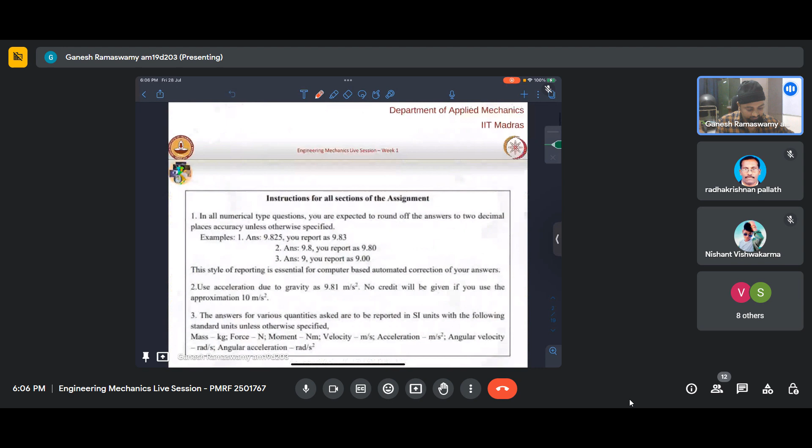Okay, then let us get started. Let us look at the first question. But before that, it is important to note that each and every week you will find the instructions to all the assignments, which are more or less common for every week. We need to keep this in mind, because given the sheer volume of courses being run on the SWAYAM portal, it is not possible for each and every course to be graded manually.

Hence, we go for computerized grading, which has its merits, but there are some limitations we need to respect, some constraints, in the sense that if your numerical answers are beyond that range, it might be graded as incorrect, even though you might have understood the concept clearly. So it is very essential that while doing the calculations, you please abide by the instructions given on top of each and every assignment sheet.

And mostly the G value we'll take to be 9.81 instead of 10. And mostly all the questions will have its units mentioned there, so please make sure that you answer the questions in the units that have been asked in the question. Other than that, the things are pretty straightforward, so we'll take the questions as we go along solving the problems.

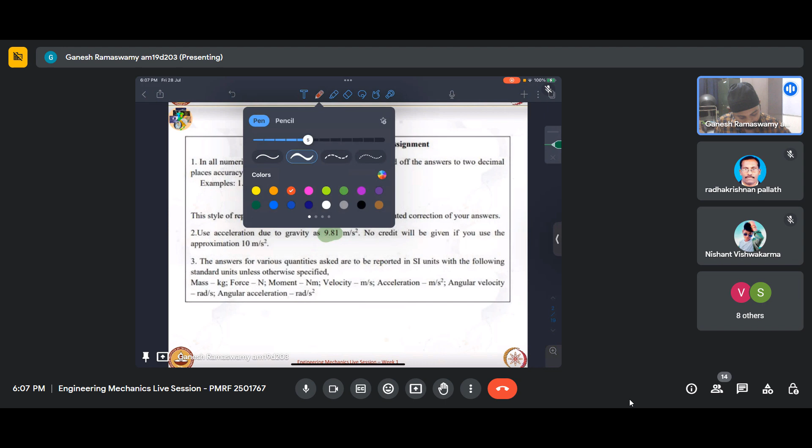Okay, so let us look at the first problem. Which of the following representations, one or more, follow the laws of vector addition to give A plus B equaling R? So we have four options here.

If we take case number one, I have a vector like that, which is A, and I have a vector like that, which is B. Now we know that when there are two vectors to be added, essentially what we do is we place the tail of one to the tip of the other, and then connect the rest to get the resultant. If this is A and this is B, this gives C such that C is the vector sum of A and B. This is pretty straightforward; I suppose almost all of you are familiar with this, but it's good to start with fundamentals and then build upon them so we don't get stuck midway.

So with this background of understanding, let's look at the options. I'll remove this option here. We have A like that, and then B takes it down, and then we connect the tail to the tip of the vector, and we get the resultant. So this surely follows the law of vector addition.

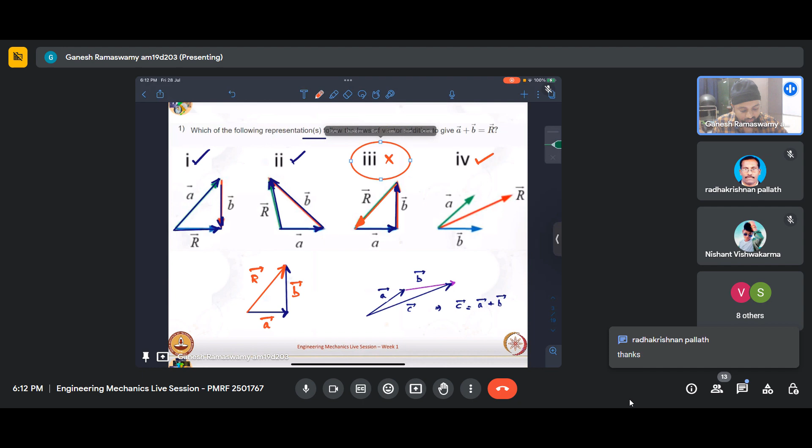So we can see that option D definitely follows. So the answer to this is 1, 2, and 4. Option 3 does not follow the law of vector addition. I hope this is clear. If there are any questions, please feel free to ask anytime.

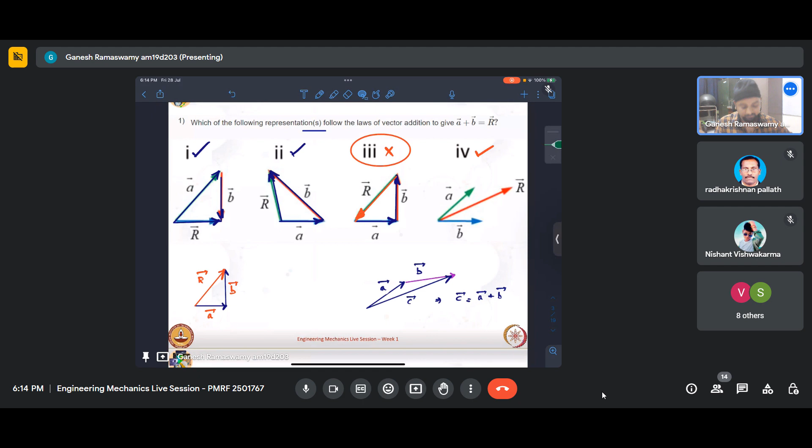So let me move on to the next question.

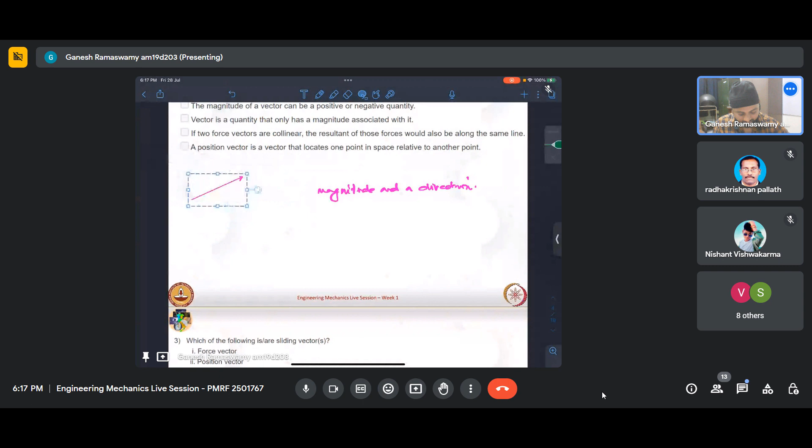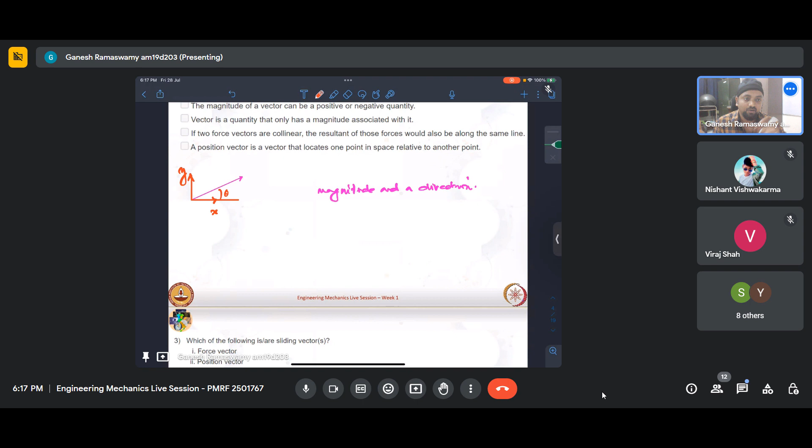So I would rather draw this again. Let me explain it first: we have a vector like this, with a magnitude and a direction associated with it. If we place it in space, let's say this is the x direction and this is the y direction, and I have this pink colored vector making some angle with the x-axis. The moment we have an angle, we have the direction associated with that vector. What else is needed to characterize this vector? Its length - once we know the length and direction, we know everything about that vector. So the length is characterized by its magnitude, and the direction is defined by theta.

So if we consider the same example but with a negative force, essentially what happens is that theta has changed, but the magnitude still remains the same. So the magnitude of any vector, which characterizes its length, is invariably a non-negative quantity. So this statement is not correct.

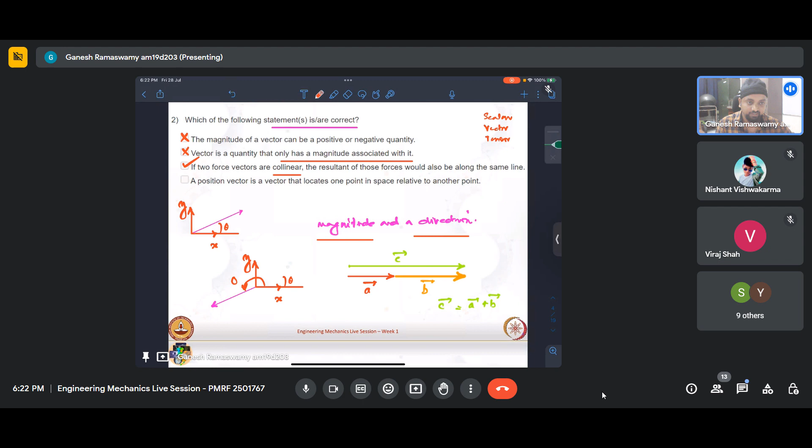Yes. So essentially what we do while discussing, I'll just add one page here. Position vector is essentially useful in dynamics because even in statics, for calculating moment, if we have a body and we apply a force on the body and we are trying to calculate its moment about some point O, this is where the force is applied. So essentially I have to find out this vector. If I call this point A, then this vector is R A with respect to O.

Now R A with respect to O, this A is where force is applied. O is a point with respect to which moment is calculated. Now I'm just trying to explain this with an example of a force and a moment. So it will apply the same to other vectors like displacement, acceleration, and so on. I hope that is clear.

So what we essentially do is when we say we are to calculate R A with respect to O, the first step we do is we imagine, in the Cartesian coordinate system, we imagine the XY axis. We are talking about planar conditions right now, the XY plane. When we go to 3D kinematics, we will explore the third dimension also. But essentially, the principle still remains the same.

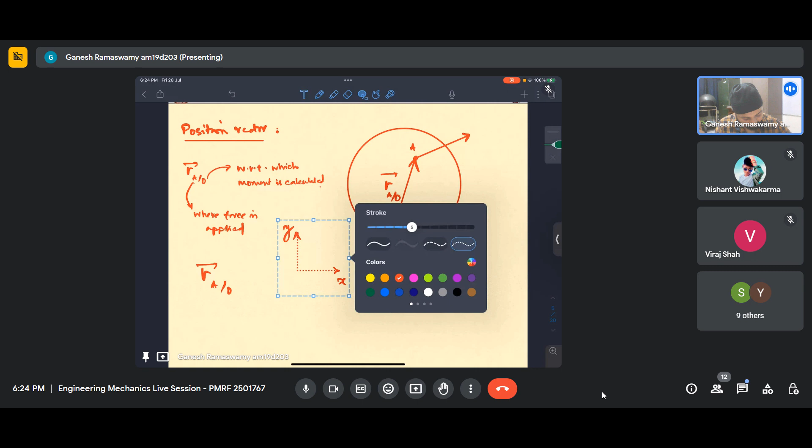So the first thing we do when we have to calculate RA with respect to O is take a coordinate system. We know we have to calculate RA with respect to O, so we fix that coordinate system at O, the origin at O. We shift the origin of this coordinate system to O, as you can clearly see.

Now the position of A with respect to O, with O as the origin, we can easily calculate once we know this distance. Let us say its length, by some geometric condition we know its length, whatever that is. Let me draw it here.

Let us say this is some M, and it makes an angle theta. So my RA with respect to O would be M cos theta i cap plus M sin theta j cap. This is how we write the position of A with respect to O.

Now if we were to do the same thing for R of O with respect to A, this is nothing but the negative of RA with respect to O.

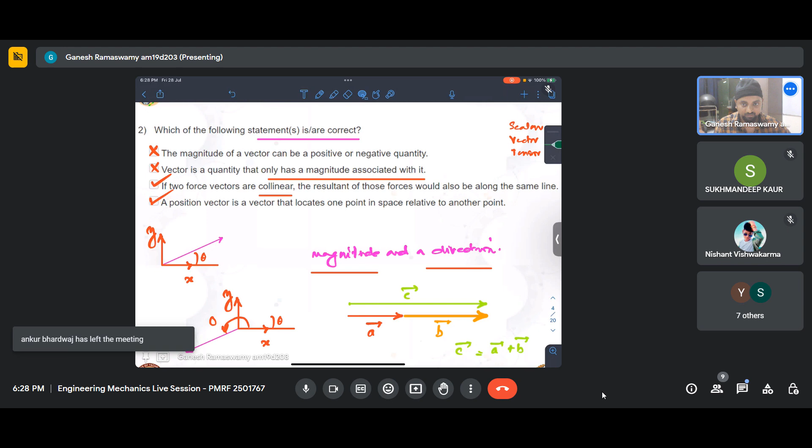Okay, so let us move on to the next question. Which of the following are sliding vectors? Force vector, position vector, and moment vector. So essentially we need to understand about vectors.

So we will have free vectors, we will have fixed vectors, and we will have sliding vectors.

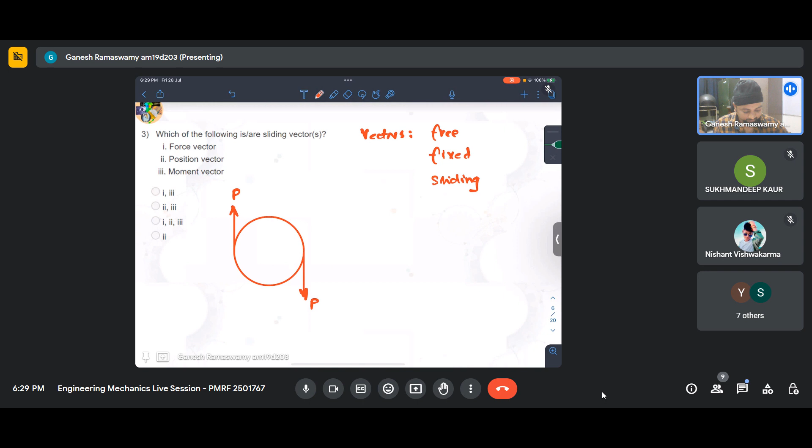Now let us say I have a system, and I apply two forces on it. Let this be force P, and let this also be force P, and let us say that this distance is D. This mushroom colored body is where I'm trying to apply this force. So what will be the net effect of this force?

Let us say that I calculate the moment about this point. Let me call this O, and let me set up a coordinate system like that, X, Y, in green and small. So now I have fixed an xy coordinate system to that point properly.

Now I'll calculate the moment about O. Moment is given by R cross F, it's a cross product. So what is R? Let me call this point some A. So moment at O is RA with respect to O, crossed with force, and force is P vector. Force and moment vector are sliding vectors, so the correct answer is option A. One person has already given the correct answer, so we'll discuss why that is anyway.

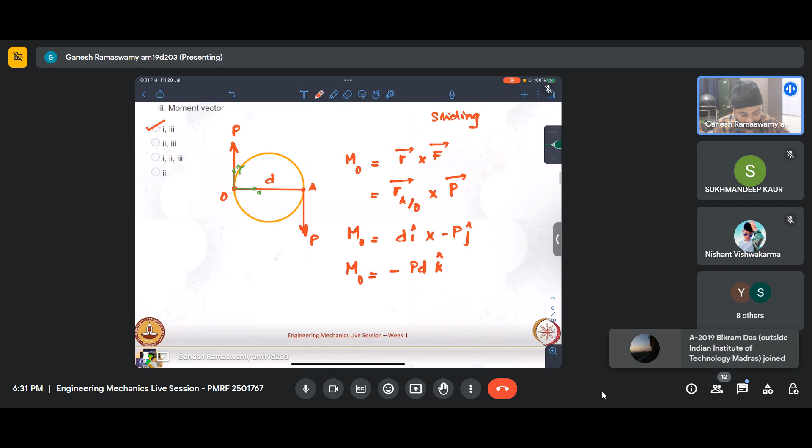Now this moment is a couple that is getting formed, and if I put that couple, let me represent the same system again. One minute, let me make this again. Now what I'll do is I'll replace this with that coupled system.

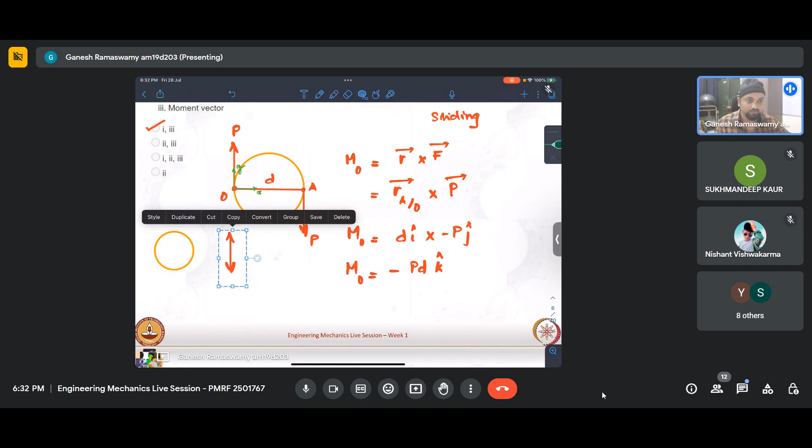So what is the total force? Total force acting is 0, because I have one P acting like that and the other P acting like that. So how will I add them as vectors? I will put the tip of one onto the tail of the other, and I essentially come back to the same point. What does that mean? That the net force is 0 — there is no net force acting on the system. I hope that is clear.

Net force equal to 0. Net moment is PD about this point — there is a couple like this. It so happens that when there are two equal and opposite forces placed a distance d apart — needn't be d, call it any variable apart — it will create a couple, and that couple is a free vector. Meaning I can move this around to any point in this body and it will give me the same external effect; it will still rotate and give the same external effects. This is what is meant by a free vector.

Okay, next, if we look at a fixed vector, essentially the position vector is a fixed vector in space.

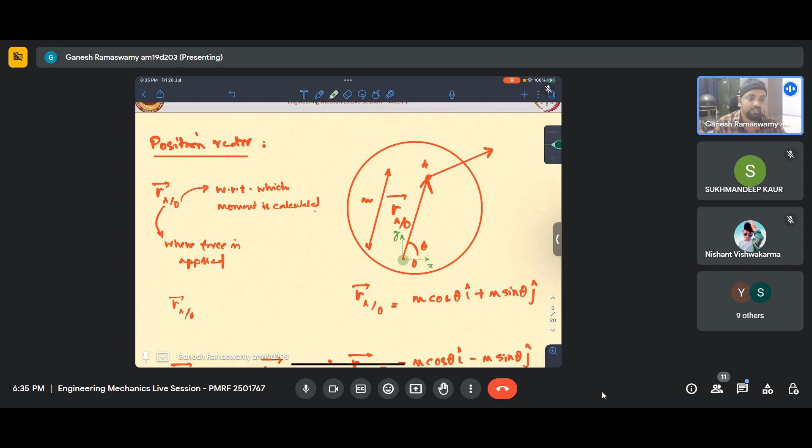Okay, so we were discussing fixed vectors. Right now we are dealing with a course that idealizes bodies as rigid; we have not gone to idealizing them as deformable. So what does rigid mean? That under the action of loads, the distance between any two points on an object doesn't change — that is the definition of a rigid body. So when I say R of A with respect to O, point O is fixed and point A is fixed. I needn't say this is specifically point O — I could take any point and label it as O — but once labeled, and A labeled with respect to it, nothing else changes; I have to be consistent with that. In such a case, the position vector becomes a fixed vector. So that is what a fixed vector is.

Now coming to a sliding vector — to understand a sliding vector, we must understand the principle of transmissibility of a force. What this says: let us say I have an object like that.

I'll repeat this in Hindi, but first let me cover it in English. Let us say I have an object like that and I apply a force here. What do we anticipate — this will have a translation and a rotation. Call its CG here — it will translate as well as rotate.

Now the principle of transmissibility states that if I have a line along — if I have a line like that, let me make this line dotted, let me color it something else — the blue dotted line is the line of action of that force. Let me move it a little bit and get a copy of this.

I'll keep that force for now. This is the line of action of that force. I hope this is clear.

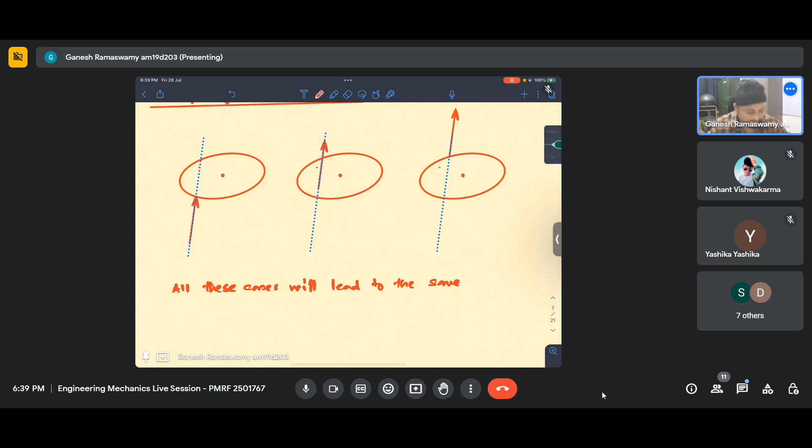This is what principle of transmissibility states. If there is a force applied to a rigid body, and if you move that force along its line of action, the external effect on that body remains the same.

What is the external effect in this case? It will translate and rotate. If you apply that force, what will happen? It will go like this and rotate like this. So that is the external effect. This is what principle of transmissibility states.

Now this can beg a question. Moments will be different? Moments will not be different. That is the entire thing.

Let us say this is the CG of that body, okay. It's a good question you have brought up. Let me try to answer it convincingly.

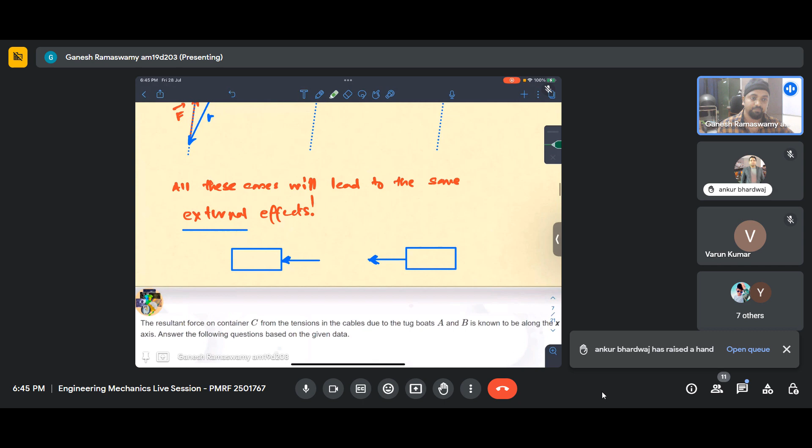That is why principle of transmissibility only applies to rigid bodies. Exactly. But they are rigid bodies, so it doesn't matter. Exactly. So that point, I suppose it has been conveyed successfully, or you would have perhaps gauged it on your own.

So this is what a sliding vector is. Force essentially is not changing its... Yeah Ankur, Mr. Ankur Bhardwaj, I will answer your question, so you can unraise your hand. Okay, so force essentially is a sliding vector because when we slide the force along its line of action, it does not cause any external effect change. That is what a sliding vector is.

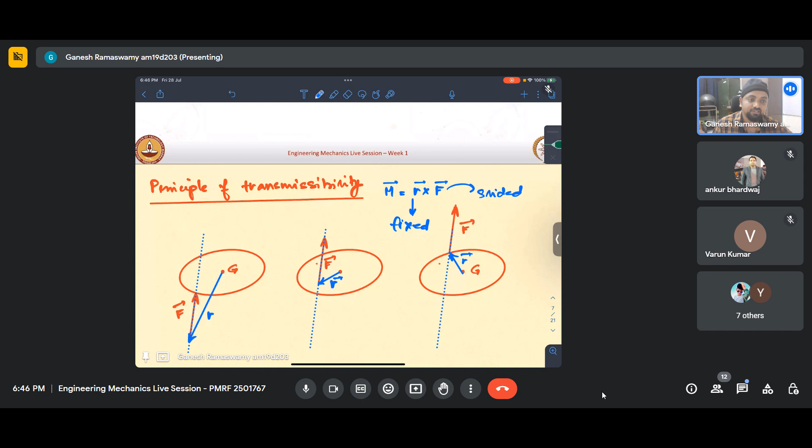Now we know that moment is r cross f. This is a fixed vector, and we have force as a sliding vector. So what should moment be? R is fixed, and force F is sliding. So essentially moment also becomes a sliding vector. So I hope that is clear.

Sliding vector. Yeah, I saw some gate exam question, I'll come to that in a minute. So force is a sliding vector, position vector is a fixed vector, moment is a sliding vector. So 1 and 3 - whosoever had answered 1 and 3, it is correct. So I hope I explained it clearly.

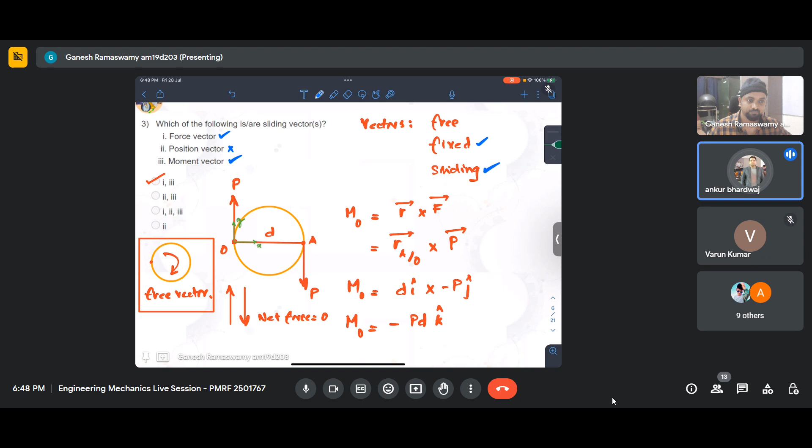Yes please, somebody had raised their hand. Please go ahead and ask. Okay. Okay. Okay, I'll try to explain here.

You can refer the lecture. It is said in the lecture. You watch lecture number 2 or 3. It will be discussed there. Professor will be discussing it there.

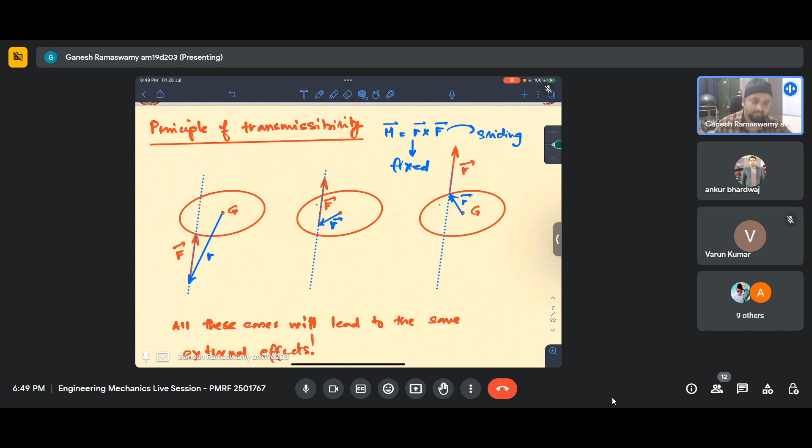Okay. Main lecture notes transcripts would be available on the Swayam portal on the left bottom - text transcripts, it will say. No, that we don't have access to. That only professor has access to. Okay, but those slide screenshots along with the text explanation is what is provided in the transcript. So the transcript should serve your purpose well. There is absolutely no problem about it.

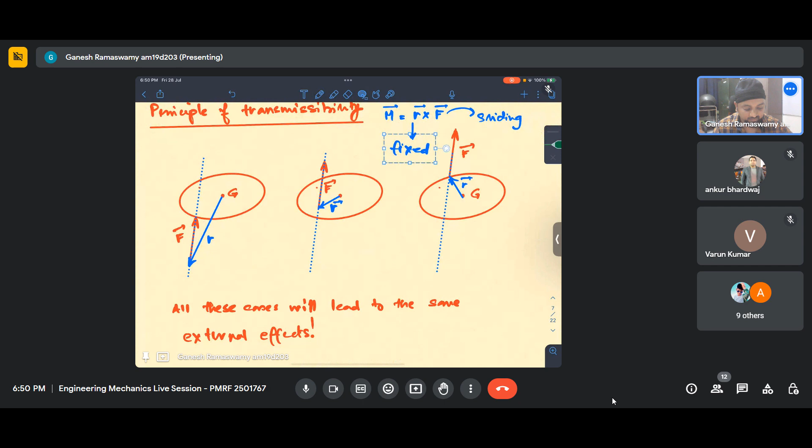So what I was saying is if a body has a force applied as a sliding vector, why does sliding it essentially carry over its dependence to the moment vector? Simply speaking, if one variable is fixed and the other has a variation, what will you call M to be having? Will it have variation or not? That is all the principle is.

M won't vary. Why M won't vary is because of this distance. What is M? M is essentially a cross product, so the cross product between these two will essentially involve this perpendicular distance only, and that perpendicular distance always remains the same. This is why the moment will come out to be the same. You can calculate it and see for two, three cases.

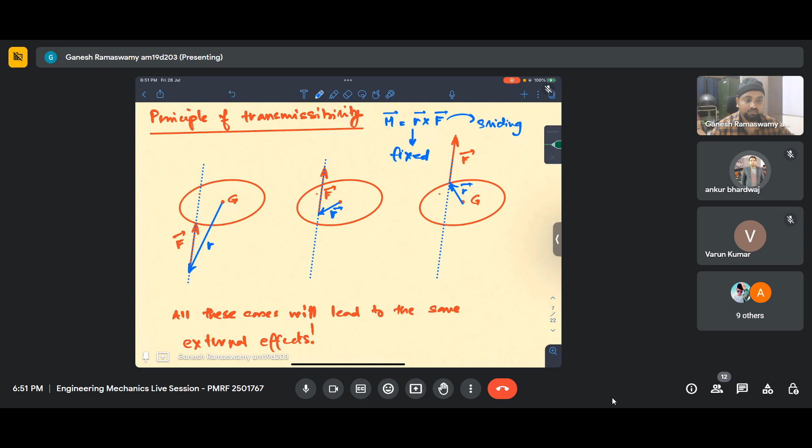Okay, so I take it that this is clear. I'll just remove this. Let us move to this question.

The resultant force on container C, from the tensions in the cables due to the tugboats - these are tugboats essentially trying to pull it or something - A and B is known to be along the x-axis. So they have given x-axis like that, y-axis like that.

One thing we need to keep in mind throughout this course and throughout mechanics study is that we follow the right-handed coordinate system. What that means is if we have x like that and y like that, z will invariably be pointing out of the plane of the paper or the screen as we see it. So z would be like that because of the right hand rule. This is how we have to follow cross products also. Please don't forget this.

I'll just keep it here. Okay, so here x is to the right, y is pointing upwards. Can anyone tell me where positive z will be? Will it be out of the plane of the paper or into the plane of the paper? Yeah, essentially it will be out, because if we see the cross product, x cross y comes out of the plane of the paper.

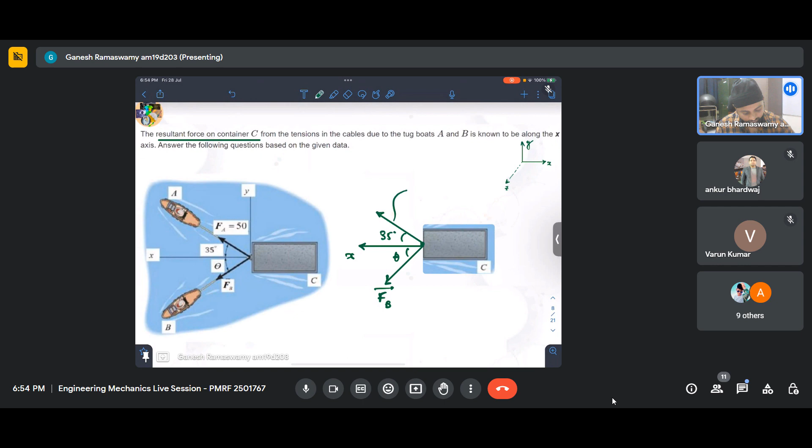So they have said the resultant force on container C - let me take container C and put it here. At this point I have two forces being applied. One is like that, and another force is applied like that. This is FB, an unknown force. This is the X direction, and this is given to be some theta, 35 degrees. And this force is given to be 50 newtons. I suppose it is in Newton - yes, it is in Newton. So this is 50 Newton, which is FA.

Let me color this in something else. Okay, the axis is colored in pink, and I have Y like that. So this is essentially the free body diagram of that container C. Now there are certain constraints given, let us look at them. Let me draw the arrowhead correctly once. So I hope that this is clear.

Now what they are asking is what should be the value of theta for force FB to be minimum and the resultant to be along the x-axis. So this is a rigid body, so we are only concerned about the force, not the internal effects that are happening.

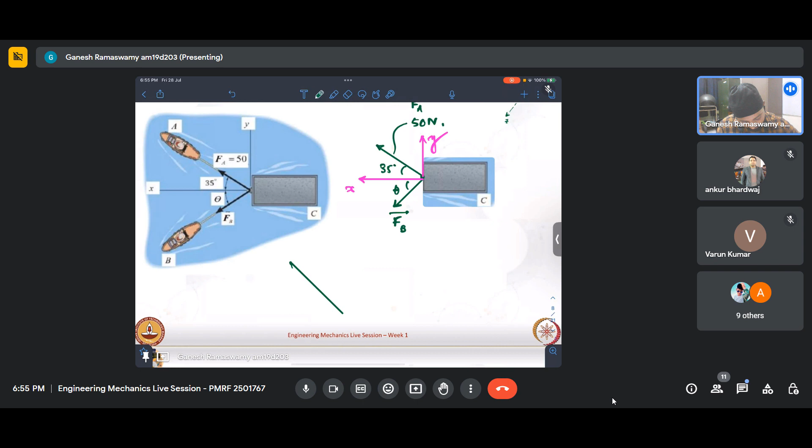Let us say I redraw the force F like that. I'll take it to the next page. Wait a minute. Let me put it here and erase these things. This is my x-axis.

And then I have a force applied like that, known to be 50 newtons, and this angle is given to be 35 degrees. And then I have another force at some theta applied. Now if I were to find the resultant of these two forces, what do I have to do? I have to take this force of unknown magnitude and apply it like that, and connect this like this. So that will be my resultant vector. Now the question says that resultant has to be along the x-axis.

So what this means is - let me remove this - the force here, whatever is applied, should be such that my resultant essentially comes to the x-axis. So if I extend my x-axis like this, let us say I extend my x-axis like that. Okay, let us say this is my x-axis.

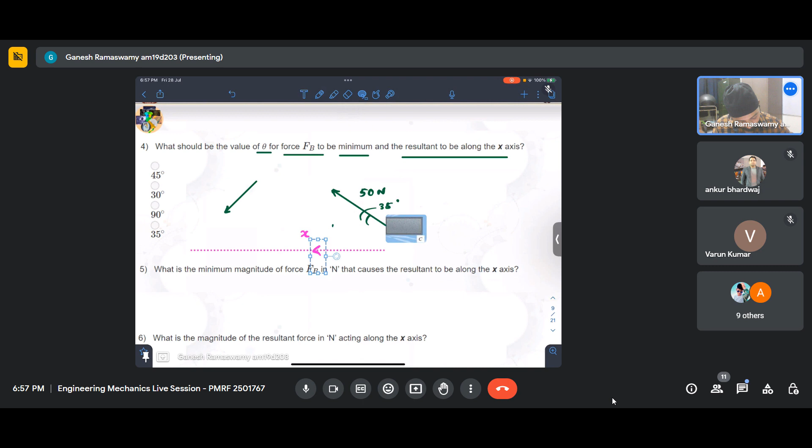This is x. Now 50 Newton is applied. Next is to apply FB. This FB that is applied, let me add it to this vector. Let me say this is the force FB. This leads to my resultant coming like that, and it is along the x-axis.

So it is not difficult for us to think that there could be infinitely many combinations of F and theta that could take the resultant to the x direction. This also will take the resultant in the x direction. This also will make the resultant in the x direction. So anywhere I move along this line, my resultant will be in the x direction.

Now the question says the constraint is, first constraint we have respected: it says the resultant should be along the x direction. What is the second constraint given in the question? FB should be minimum.

When is FB minimum? We can see pictorially that FB will be minimum when this is perpendicular to this. This is the least length that FB can have. I hope this is clear. When this becomes perpendicular, this is actually FB. So this, when this becomes perpendicular, that is when it will be the shortest. So FB essentially will be minimum only when it is perpendicular.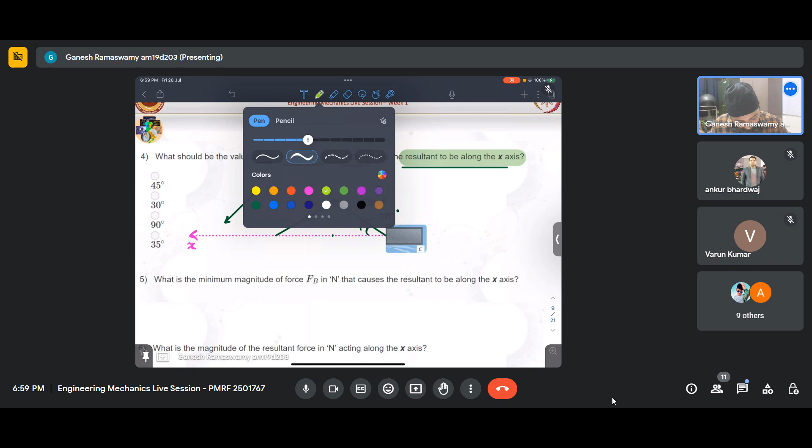Now, if I put my coordinate system here, x and y, this was theta. This force, any force that is applied, I have this was essentially theta given in the question here. So they are asking what theta will meet these two constraints. I know that when I select this force and make it perpendicular to the x-axis, that is when FB becomes minimum and the resultant is along the x-axis. That is when I have respected both constraints, rather satisfied both constraints. In such a case, what is my theta?

Theta is this angle. So theta becomes 90 degrees for this to be correct. Is it clear?

Yes. Yeah. Yeah, yeah. It will. Yes, that will cancel out the resultant, which is what I'm coming to. It's a good point that you have asked.

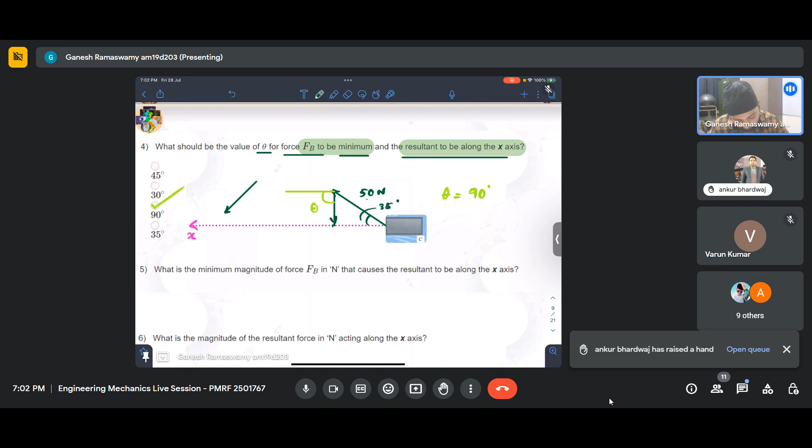So what Mr. Ankur was asking, I'll just answer in one minute. Now we have clearly established that theta needs to be 90 degrees for it to hold, for this constraint to hold.

In this case, what is the minimum magnitude of FB is what is asked. Now let us redraw this scenario again. I'll not draw the container, I just have this force. This is at 30 degrees or 35 degrees or whatever, 35 degrees. Then let me draw that force in red.

This green force can be resolved into two components, which is this and this. The horizontal component will be 50 cos 35 degrees, and this will be 50 sine 35 degrees. I hope that is clear. 50 sine 35 degrees, I can move this component to this place. This is what makes this force up, right? Delete this. So essentially what I have done is I have simply resolved that 50 Newton force into x and y components. I hope that is clear.

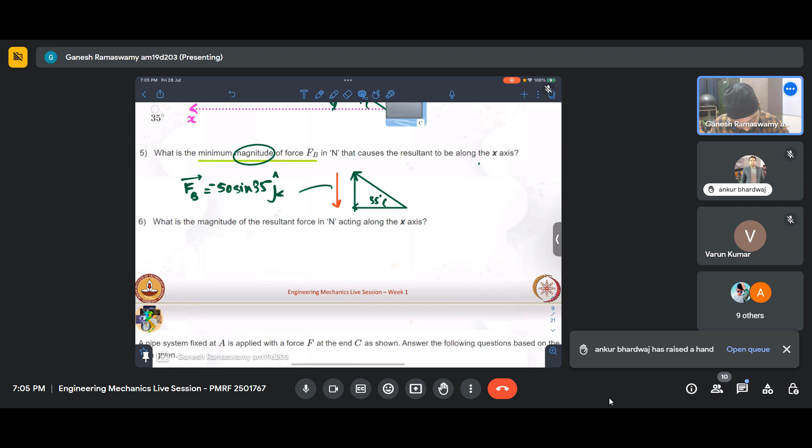So what is the magnitude of FB? It will come to 50 sine 35, which is 28.68 newtons.

Now the next question that is asked is, what is the magnitude of the resultant force? We know what is the resultant force. We had a force like that, which was 50, at 35 degrees to the x-axis. This is the x-axis, this is 35 degrees. And then we had a drop, making the resultant come into the x-axis. So essentially, my resultant is this vector, which is easy to see is nothing but 50 cos 35 i cap.

Again, we have been asked for the magnitude, so we have to repeat: 50 cos 35 is 40. So magnitude of FR is 40.96 Newton. Yes, so whosoever answered it, it's good that you are also solving it along.

I encourage it, and in case if I make any clerical errors, you will always be able to catch them. So it's good that you also solve along so that you don't have to spend time watching this session again. It's essentially more productive if you do it side by side rather than watching it later. So I hope that is clear, and I suppose, Mr. Ankur, I've answered your question and it is clear.

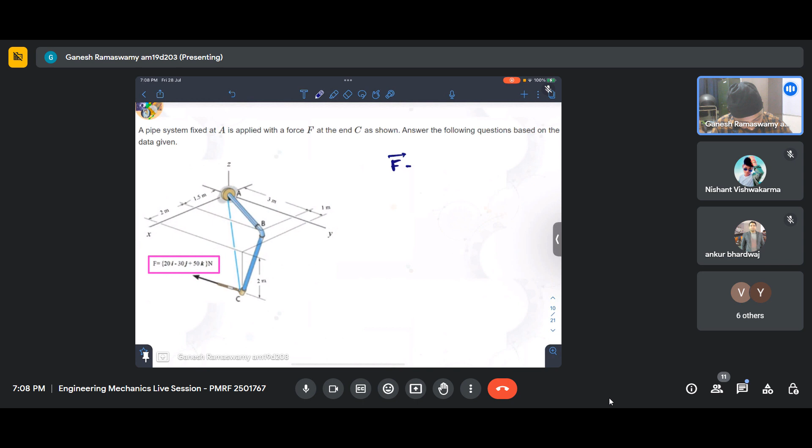Okay, so please take a look at the figure clearly. I'll also try to zoom in when I solve. A pipe system fixed at A is applied with a force F. This is F, this is the F vector. So F is given as 20 i cap minus 30 j cap plus 50 k cap.

So if one has any problems, or rather is not confident about solving questions in a 3D coordinate system, please pay attention to this question and get your doubts clarified so that once and for all those are closed. It is not much different from what we do in two-dimensional analysis. Only the cross product becomes a little more involved, which we will do threadbare so that you can understand it clearly once and for all.

This is my force, and I have been given this is my x direction, this is my y direction. Can we see that x cross y comes like that? In any question, if x cross y given is not following the right-handed coordinate system, it implies that something is incorrect, at least with the convention we are following. So if you come across such a case in the assignments, you can raise it in the forum, but I doubt there will be such a case. So we have x axis like this, positive y like this, and positive z like that. So we have been given this.

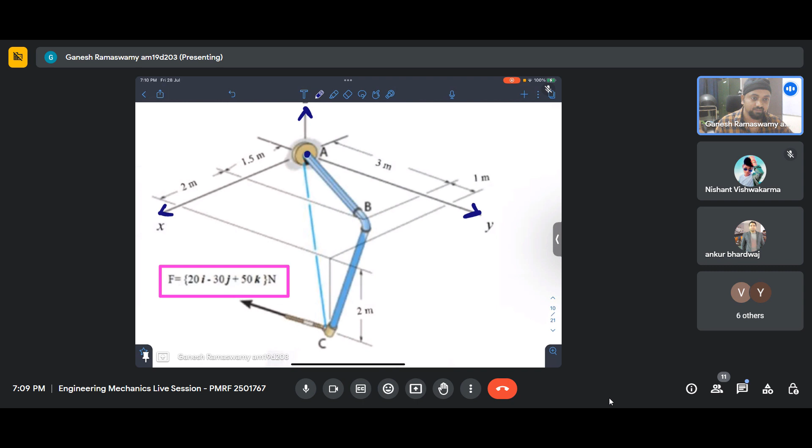Okay, now let us try to understand this figure a little more. Yeah, it's a bent pipe. Yes, exactly, it's not a straight pipe. It's a bent pipe with a bend at B.

Yeah, it is essentially an elbow. At B, it is an elbow that has been provided. And about this point, it is because it doesn't allow rotation. It says it is fixed, right? So it is fixed in space. What are the degrees of freedom it can have? It can either translate about the three axes, or it can rotate about the three axes. None of which is possible in this question because they have clearly mentioned that it is fixed at that end.

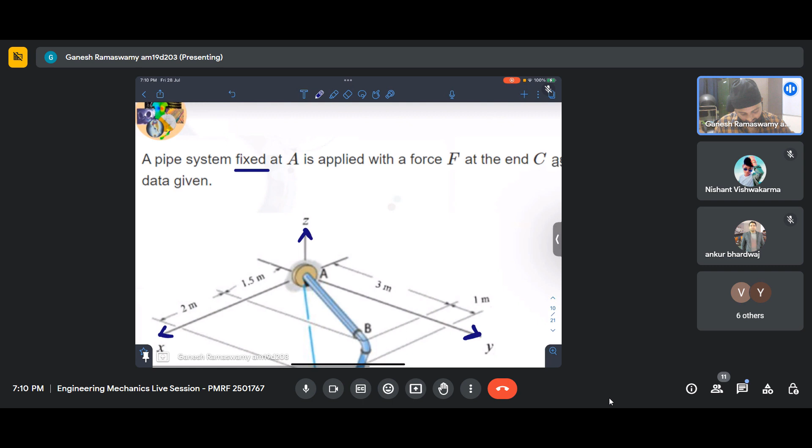So let us look at this question, this figure, in more detail and try to understand it better. We have a point A. Now to get to B, B is in the XY plane. We have to understand that this is the XY plane and B is in that XY plane only. How will we get to B from A?

Essentially, in the X direction we have to move 1.5 meters. And then in the positive Y direction, how much? 3 meters. That is how we get to point B from A.

So if I were to write R, as we discussed earlier, RB with respect to A, what will that vector be? We just saw we have to move 1.5 in the positive x direction, and 3 in positive y direction. Do we have to go out of the plane? It is in the same xy plane, so it is 0 k cap. I may as well not write it, but I'm writing here for clarity. Are there any questions about how we got RB with respect to A? I hope it is clear.

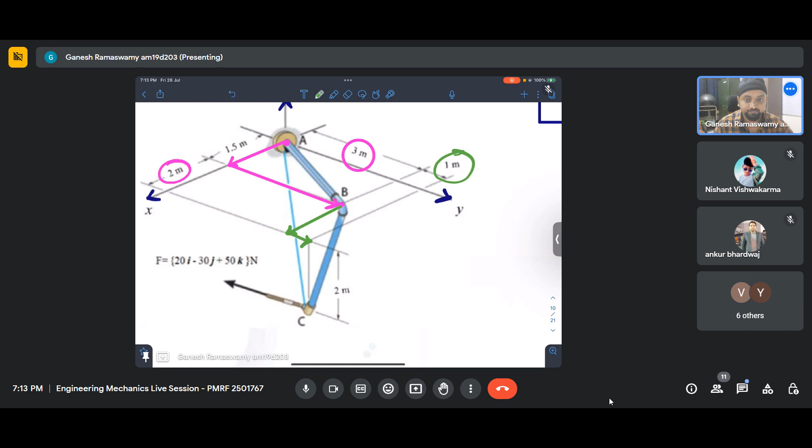Now let me see how I will get to C from point A. Initially let me go to B first: 1.5 in the X, 3 in the Y. Now I have to go in the X direction 2 meters more — let me draw that in green — I'll go like that by 2 meters from B. Then I go in the positive Y direction by 1 meter. Then I go down by another 2 meters, and then I reach C. Is it clear?

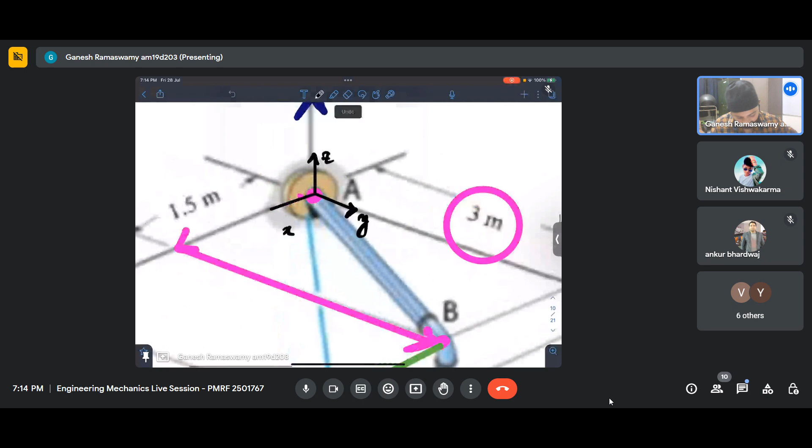So if I had that same XYZ coordinate system — this is our coordinate system, right? This is my coordinate system. First I had put the coordinate system here. Let me align the axis also so that there is no confusion. Just a moment. Okay, this is becoming a mess, just give me a minute. Okay, good enough for our purpose.

That is my coordinate system XYZ. Let me make a copy of that. Now, with the understanding that this is X, this is Y, and this is Z, please keep note of that. Initially what I did, I put this coordinate system here at A and I wrote RB with respect to A. As we discussed, to write RB with respect to A, I must put a coordinate system at A and look at B and write the components. That we have simply done, which is this, right?

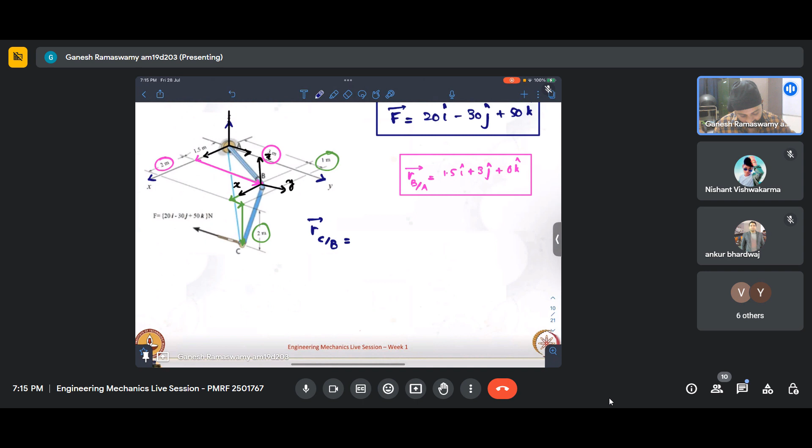So next I go to B. I put this coordinate system at B now, and then I write again RC with respect to B. So can I write RC with respect to B? What did that come out to be? I found that I have to go 2 meters in the X direction, then 1 meter in the Y direction, then I have to go down by 2 meters in the K direction, so minus 2 K cap. Is it clear? I take it that this is clear.

So let me write it a little neatly: it was 2 I cap plus 1 J cap minus 2 K cap. So we have got these two vectors, comfortably we have got. Now if I have to write RC with respect to A instead of B, what do I have to do? From vector addition, I know this is one vector, then another vector is this. To get RC with respect to A, I just need to add these two vectors. And since these are expressed in component form, it is easy for me to just add its individual components to get the actual vector. I hope this is clear.

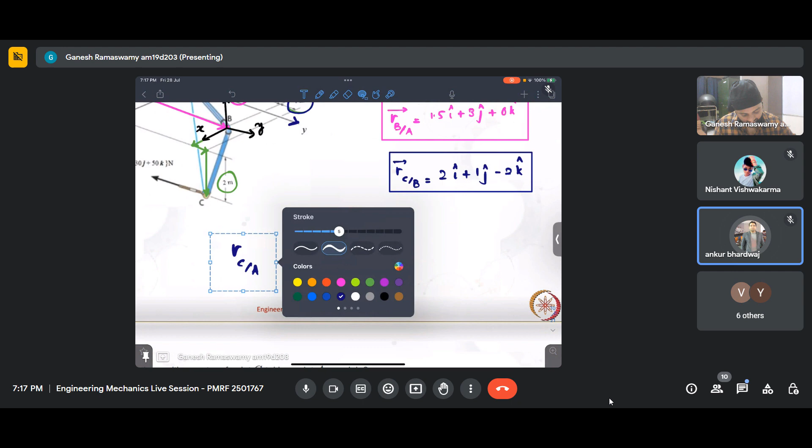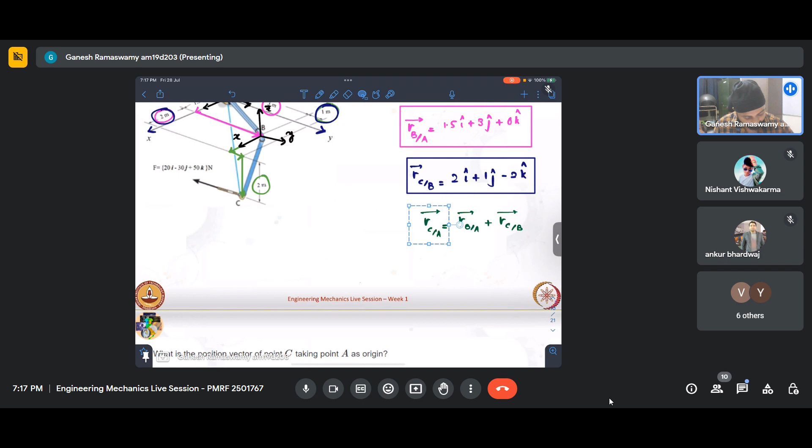If there are any questions, please feel free to ask. It is nothing but RB with respect to A plus RC with respect to B. So what will this come out to be? Can I write it from here, based on my knowledge of these two vectors, in component form? So it is just 1.5 plus 2, which is 3.5 I cap, 3 plus 1, which is 4 J cap, and then 0 minus 2, so it is minus 2 K cap.

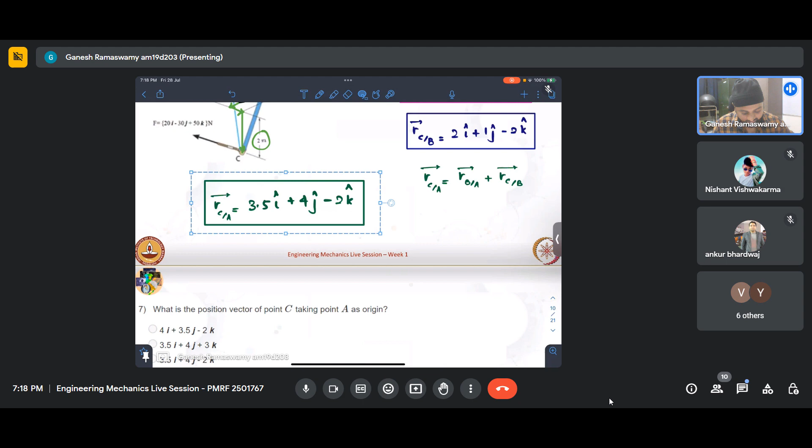All right, great. So we have got RC with respect to A. Let me take that here. So far what we have done, we saw that a pipe is fixed and it is in three-dimensional space. We wrote the force vector. We fixed two origins and wrote position vectors piecemeal and then added them together to get this. We have finally got this vector.

What is the position vector of point C with respect to A, with A taken as the origin? So we can see that this we have solved. Okay, this is our first part.

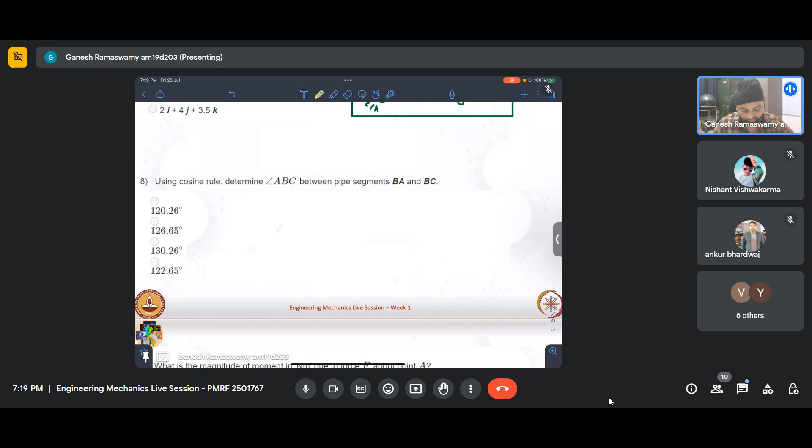Now using the second part, it says using the cosine rule, determine angle ABC between the pipe segments BA and BC. Let me clear this a little bit. When I post this file, I'll try to make it a little more neat because I'm solving it live. It could be a little more chaotic. Please bear with me.

So let me just copy this and put it here. Now, what is it that they are trying to ask?

We have a plane like this. We have a triangle formed by three sides: one side like this, one like that, and the other like that. All these three sides can be represented by vectors which we have already calculated. Now this triangle is in space; it is not confined to one xy plane, yz plane, or xz plane. It is somewhere in space. It is an inclined triangle in space.

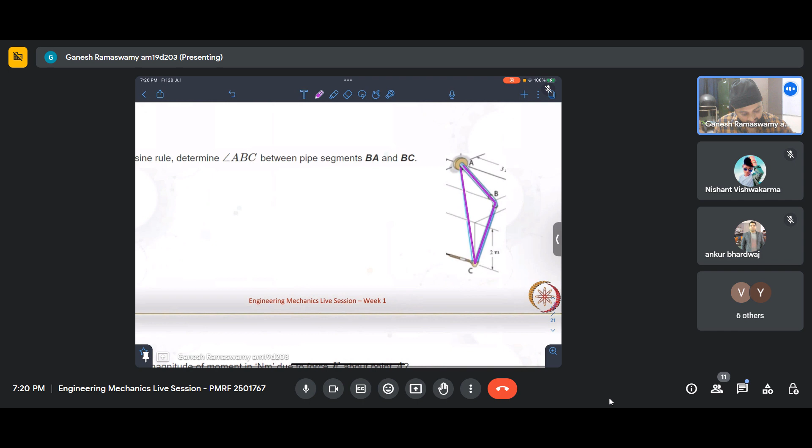So what we have been asked is, we know A, B and C. They are asking us to find this angle. Let us call this angle alpha. And we are supposed to find that.

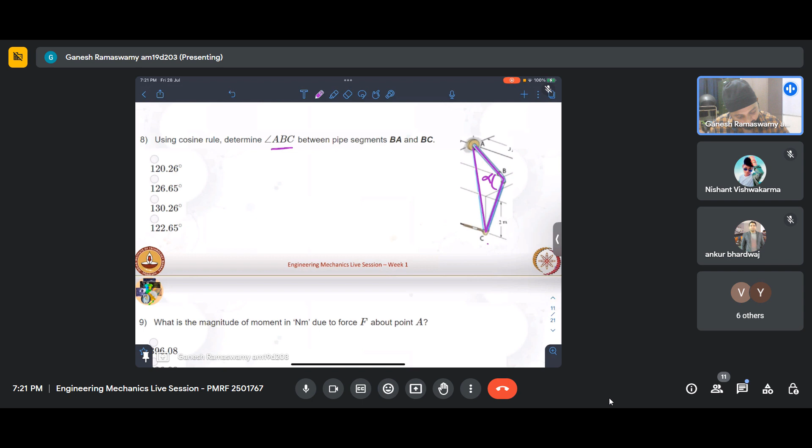So first let me give a brief about the cosine rule. The cosine rule and sine rule are important because we will be extensively using that in parts of statics, and mostly it will come in dynamics for considering relative motion and so on. So it is important that you brush up your fundamentals well.

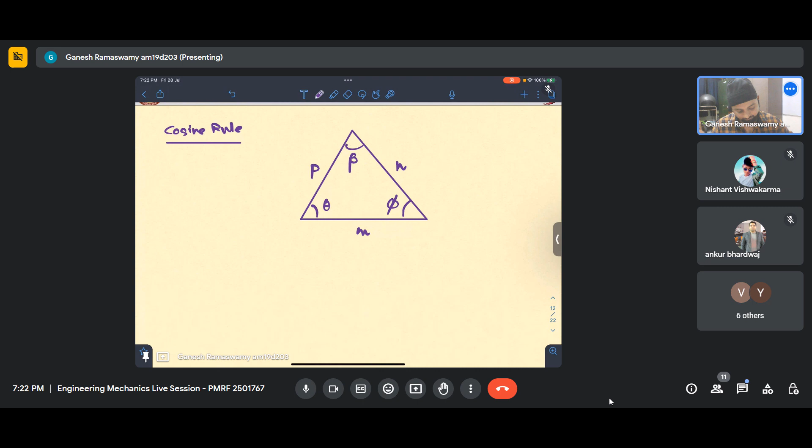So what is the cosine rule? Let us say we have a triangle. Let me call this side N, this side M, and this side P. Let this angle be theta, let this angle be phi, let this angle be some beta.

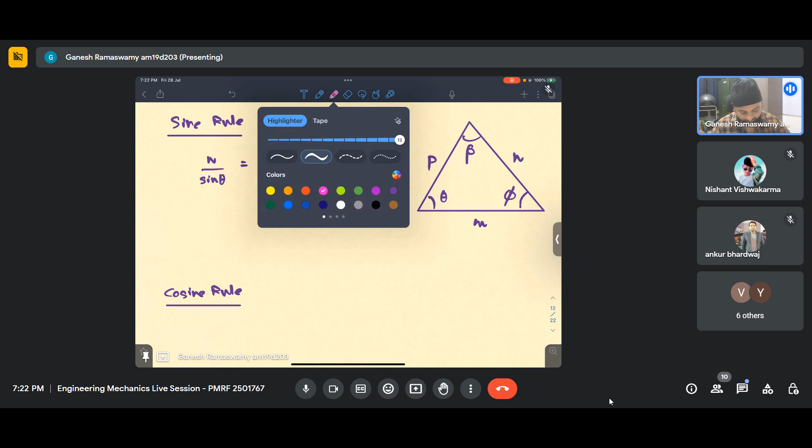Okay, so first let me start with the sine rule instead. The sine rule says that n by the sine of its opposite angle is equal to m by the sine of its opposite angle, which is equal to p by the sine of its opposite angle. This always holds in a triangle, and this is what the sine rule says.

So suppose you come across a situation where you know two angles and one side, you can easily find out the rest of the quantities using this relation. That is what this is helpful in. Let us look at what the cosine rule is.

So let us say, in the same triangle, I won't be writing all three combinations for the cosine rule; you can just extrapolate from here. Let us say that I don't know this angle and I don't know this angle either. I just know two sides, P and M. I know their lengths and I know this theta. Then I can find out the third side. Let me call this side S.

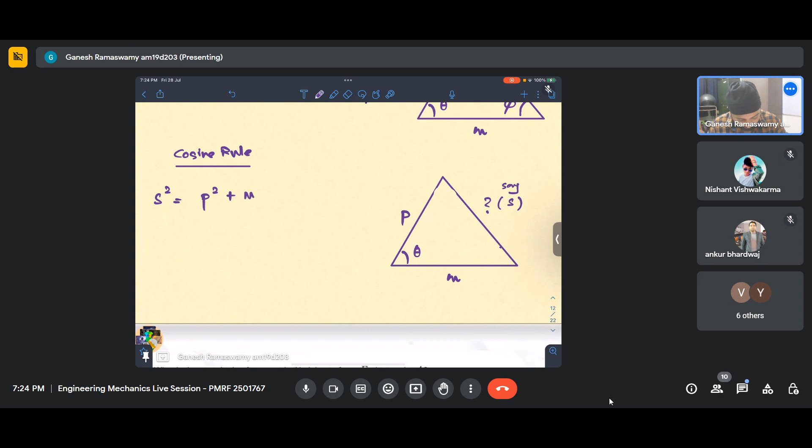Say it is S. So the cosine rule says that S squared is nothing but P squared plus M squared minus 2PM cos theta, this theta. This is what the cosine rule says. Essentially it is a variation of our vector addition, that is all — our triangular law of vector addition. It is just a variation of that where one angle is negative, that is all.

So I hope that this is clear. Please keep these in mind and practice a couple of questions so that the learning gets reinforced, and then you are able to apply them easily as and when required.

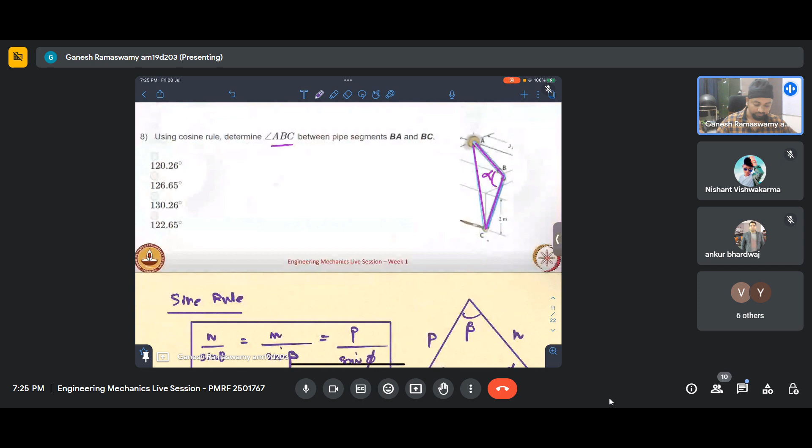Okay, so far so good. Now let us get back to our question at hand. What have we been asked? We have been asked to calculate this angle, and we called it alpha.

So using the cosine rule, can we say that AC squared is AB squared plus BC squared minus 2·AB·BC·cos alpha? We can say this. This is what we have seen in that cosine rule.

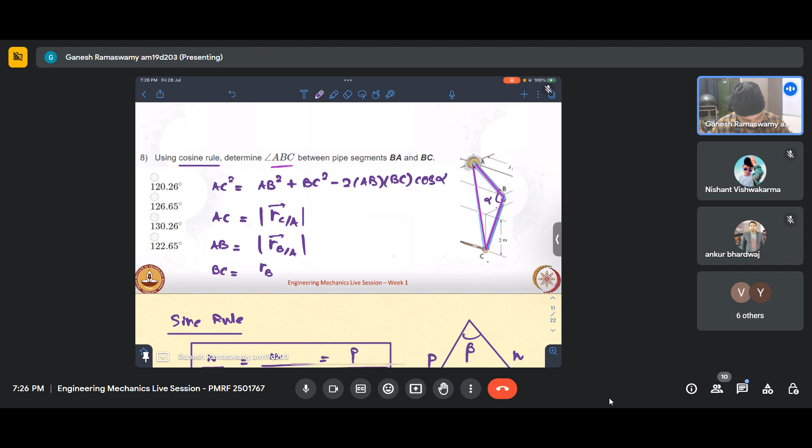Now what is AC? It is nothing but the magnitude of RC with respect to A. Similarly, AB is the magnitude of RB with respect to A, and all these vectors we have already calculated. BC, let me write, is the magnitude of RC with respect to B.

Right, so let me add one more page here. Let me take these here.

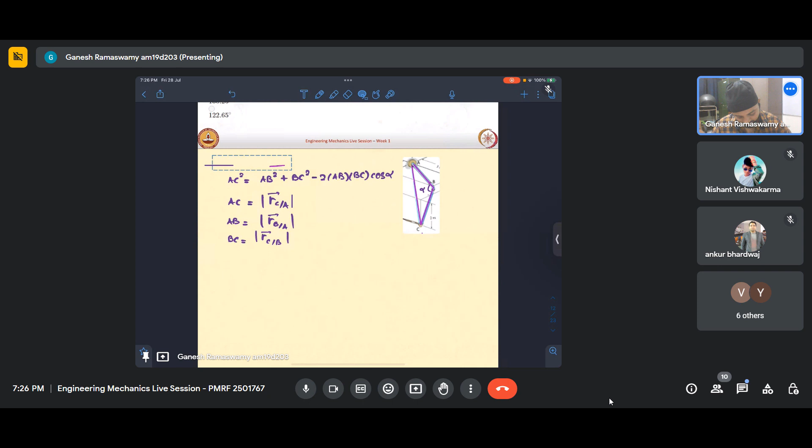So it's clear how this has come about. We have discussed this in detail. Now the rest is just a matter of mathematical calculation. Let me take my vectors from here, copy them and put them here, and let me also take this vector here.

I hope this is clear. It's a little clumsier, I'll tidy it up and upload, but for now please bear with me. Now, can we calculate AC? Can we calculate the magnitude? There is no problem, we can.

What is the magnitude of the first vector? Root over 3.5 squared plus 4 squared plus minus 2 squared. It will come to 5.6789 or whatever that is.

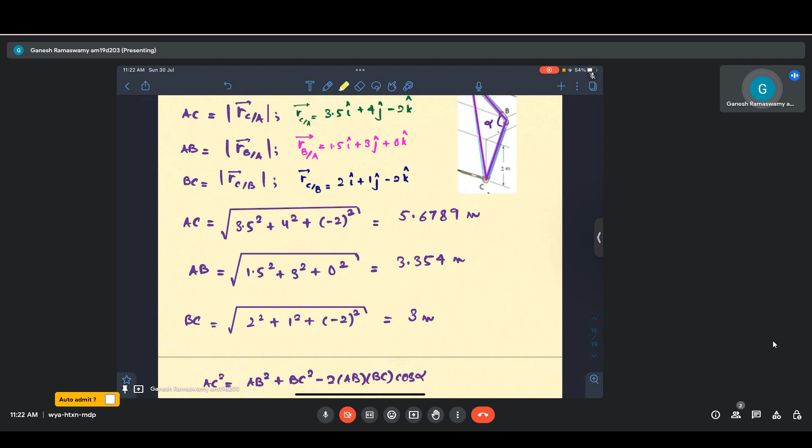So we know AC squared is AB squared plus BC squared minus 2 AB BC cos alpha. We know what is AC, AB and BC individually, so we'll just substitute that. So it comes out 32.25 is 11.25 plus 9 minus 2 into 3.354 into 3 into cos alpha.

So from here we can calculate cos alpha as minus 0.5963. So alpha comes out to be cos inverse of minus 0.5963, which comes out to be 126.61 degrees. So if we look at the options for this question, we're able to see that 126.65 is an option over there, so this is the correct answer.

I hope that is clear. The issue while solving in the live class was that these terms, we had substituted these as AB squared and BC squared instead of AB and BC. So that is why the numbers were not adding up, which has since been corrected. There was nothing otherwise wrong with the calculations, just that while substituting, we should be substituting AB instead of AB squared, which was what was happening in the live class. That has since been corrected.

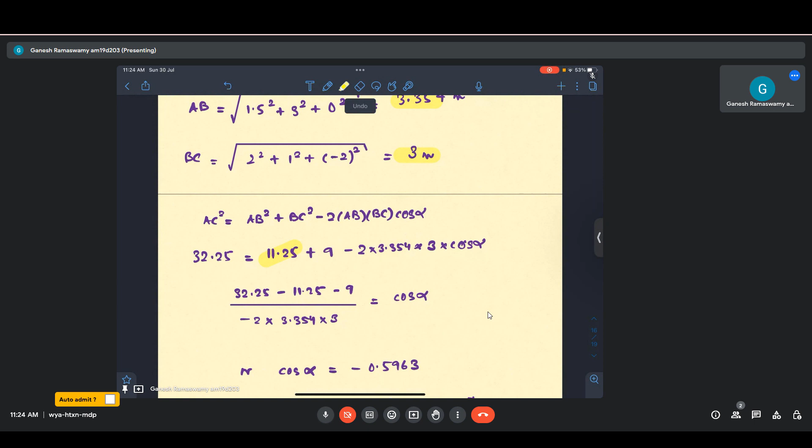I hope that is clear. My main motive was to show how position vectors are calculated and how you write them, how you add them, and how you operate upon them. So in that respect, if there are any questions, you please ask now.

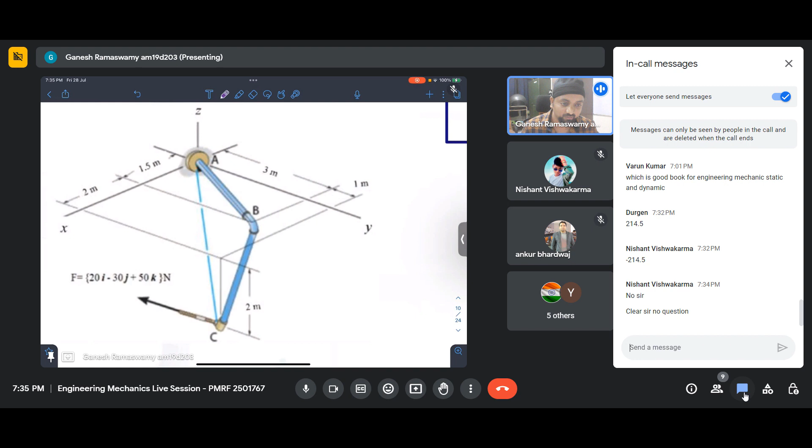Is the explanation clear? Yes, what is not clear sir, please ask. Yeah Mr. Nishant, if something is not clear, you please ask. Clear sir, no question. Acha okay, oh that is what you meant by no. All right, fine, I thought you didn't.

Okay, so I hope that I have done some justice to explaining this. So let us move on to the next question. Number 87. Anyway, when I will be posting this, I'll post it with the correct solution because there are some numbers that are not adding up. We'll see why that is.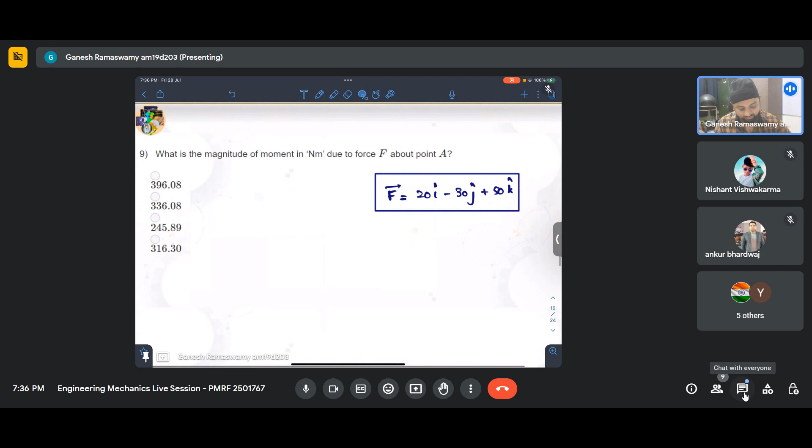Moving on to the next question, which is not essentially dependent on that because we have a force here that is given in the question. So let me bring that force here and put it here. We have this as the force, and we have been asked to calculate the magnitude of moment in Newton meter of the force F about point A. So how will we calculate that? Do we have the recipe for that?

Moment about A, the moment vector about A is - where is the force applied? Force is applied at C, from the figure we know it is applied at C. So we essentially write C with respect to A crossed with this F. That is all that needs to be done. So do we have RC with respect to A?

Yes, we have calculated that. We have it here, RC with respect to A. And here there is essentially no mistake, because let us look at the figure.

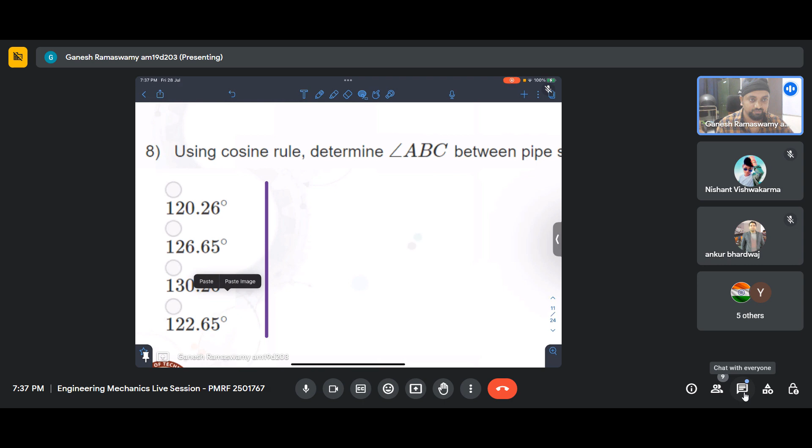Should the answer be in degree or radian? No, the question will essentially mention it. So in this question, if you see, all the answers are already given in degree symbol, so it will be in degrees. If specifically you have to report it in radian, it will be told. All the units will be mentioned in the question. So to that end, we have tied it up.

RC with respect to A. How quickly can we see this? From A, we have to walk 3.5 in the plus x direction. Then we have to go... okay, I think this is where the problem is. No, okay, this is 4 in the y direction and then minus 2 in the z direction. This is the component form of RC with respect to A. So what is RC with respect to A? Quickly we can see it is 3.5i plus 4j minus 2k.

Is that what we got here? 3.5i plus 4j minus 2k. Exactly, this is what we have got. So there is no problem in this, at least this vector. Okay, so let me put that here. This is over here.

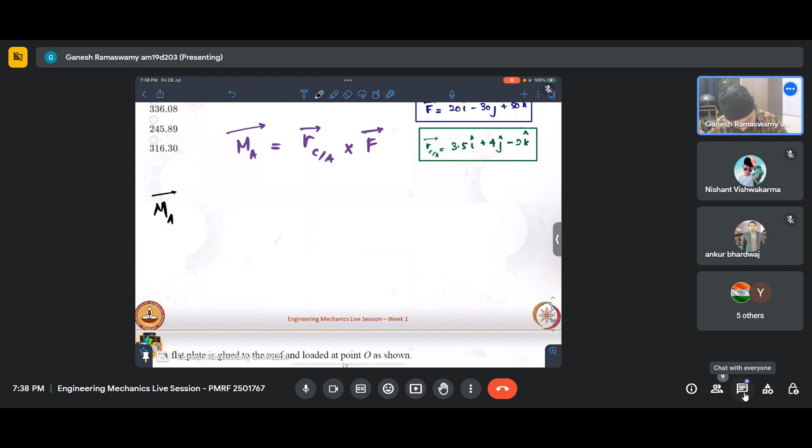This is over here. Now, do we know how to calculate cross products? It is simple, the moment vector is, you might remember that mnemonic of determinant. So essentially that is what we are supposed to do. We'll place the three components here. Which is the first part that comes? R. So we have to populate R in the second row, not F. So R is 3.5i plus 4j minus 2k. Second component is force, that is what we will populate. So it is 20i minus 30j plus 50k Newton.

So if we calculate this, this will give us the moment that is being applied. So can we do that quickly? i into 4 into 50 minus 2 into 30, plus j would be minus 2 into 20 minus 3.5 into 50, plus k. Essentially, I suppose you all are familiar with this. For i, I'm eliminating these two rows and taking the cross multiplication of the others and subtracting. It is basic, yeah, okay. I suppose you know that. k is minus 30 into 3.5 minus 4 into 20.

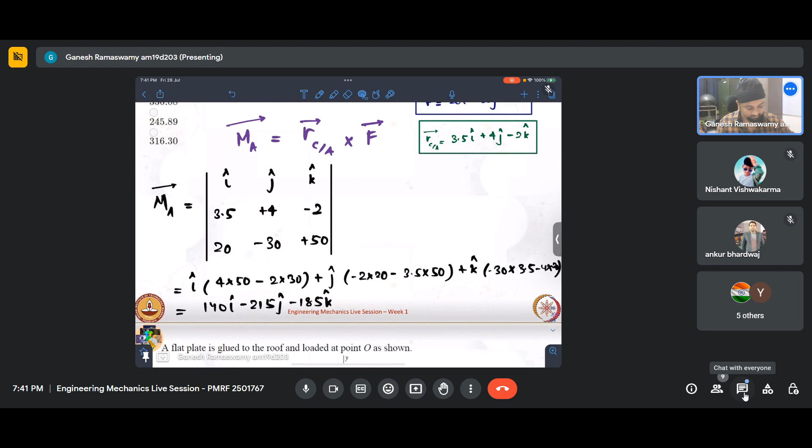So this will come out to be 140i minus 215j minus 185k, sorry, minus 185k. So I hope that this is correct and without any errors. You can just cross check in case you're solving it by the side. Okay, so we have got the moment here. Moment is correct, it's correct, okay fine. Thank you. Moment about A has come to 140 i cap minus 215 j cap minus 185 k cap.

So let us look at the question. They have asked for magnitude. Do we know how to calculate the magnitude? It is simple. Magnitude of this moment is nothing but root over 140 squared plus minus 215 squared plus minus 185 squared. Anyone, what this comes to? Okay, this comes to 316.31 essentially Newton meter.

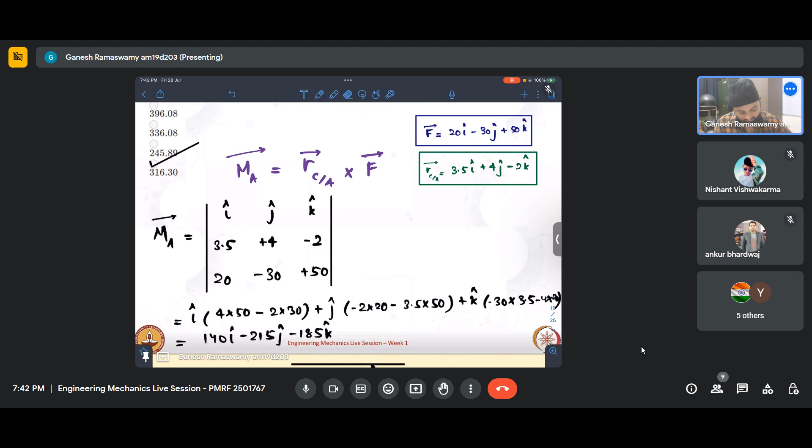So this is what we are getting as magnitude of A. So let us look at the answers. Yeah, so we have it here. So option D is correct. So I hope this question is clear. Essentially, this is how we calculate cross products. But in 2D, we will be seeing that this component won't be there. So what will happen is we end up multiplying only these two. That is what essentially happens.

Mistake in equation? Yes, please. What is the mistake, sir?

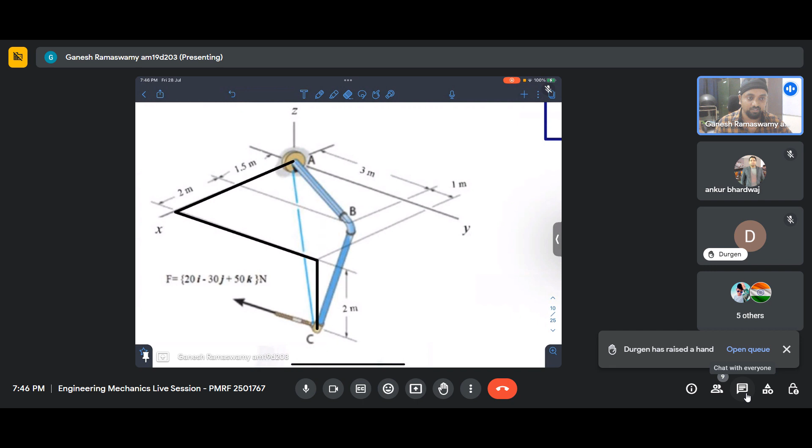Secondly, while calculating the angle, this problem helped us understand how to apply the sine rule and cosine rule. But I suppose that the sine rule and cosine rule application part is clear. That is how we are supposed to apply that.

The third part is the moment, how we calculate cross products for 3D vectors. Why I emphasized having 3D vectors in the very first session is because once we get this out of the way, then going back to 2D becomes very easy. It is just essentially one component.

Because when we look at a plane which is in the XY coordinate system, let us say, and we want to calculate moments in this plane, essentially everything will be about Z. So we will multiply these. We needn't go for this determinant form.

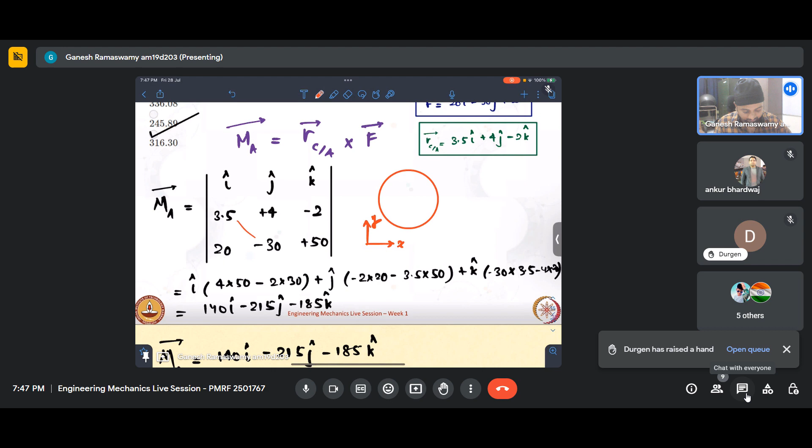But this determinant form will come in handy when we go to 3D kinematics, which will be the very last session in dynamics. Nonetheless, I wanted to get this out of the way because generally 3D analysis makes people a little clouded; they think it is quite difficult or have some inhibitions about it. So my motive was to remove those inhibitions and show that it is much like 2D analysis, just the addition of one more coordinate to the problem.

So to that end, I hope this problem has been meaningful and helpful. So if there are any questions that you have, I'll be happy to take them now.

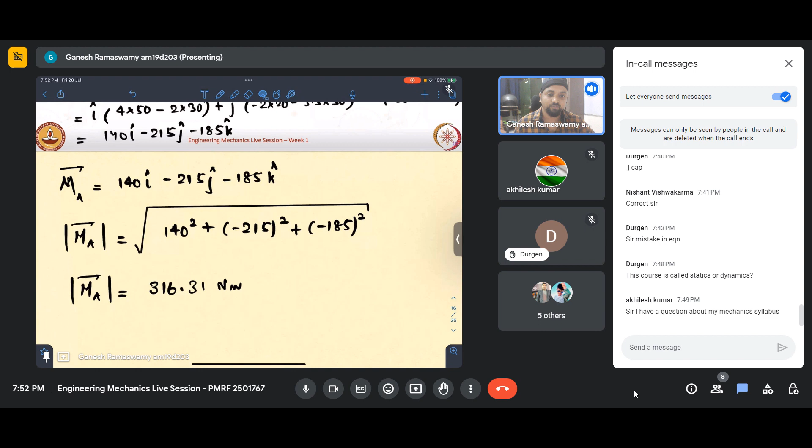Any other questions or comments about this session, or what is it that you expect? Did you find it helpful in any way? Okay, okay, thank you, I see. Oh, I see, okay, thank you very much. I hope to keep up the same spirit in the upcoming sessions also.

सर, असाइनमेंट कैसे जमा होगा? ऑनलाइन होगा। जैसे आप असाइनमेंट में जाएंगे तो मोस्टली एमसीक्यू है, कहीं कहीं पे आपको न्यूमेरिकल नंबर एंटर करना होगा, जैसे हमने ये कैलकुलेट किया 316, है ना? तो इस क्वेश्चन में तो ऑप्शन में दिया होता है, किसी किसी में बस ये ऊपर वाला दिया होगा कि व्हाट इज द मैग्नीट्यूड, और एक स्पेस होगा जहां पे आपको नंबर एंटर करके सबमिट करना है। तो जैसे ही उसमें आपके असाइनमेंट में टॉप राइट पे उसका डेडलाइन लिखा होगा, जैसे ही डेडलाइन खत्म होगा तो आपको अपने मार्क्स मिल जाएंगे।

असाइनमेंट एक तरफ है और एग्जाम एक तरफ है। असाइनमेंट में हमारा फोकस ये है कि आप पूरे सब्जेक्ट पे फेमिलियराइज हों, तो वहां पे छोटे कैलकुलेशन से उतना आप कॉन्फिडेंट फील नहीं कर पाएंगे। इस वजह से असाइनमेंट विल इनवेरिएबली बी लेंदी। बट एग्जाम में एग्जाम के हिसाब से ही आपको क्वेश्चन पूछा जाएगा। और अगर आपको ऐसा लग रहा है कि एग्जाम में कोई ऐसा क्वेश्चन पूछ दिया जिसमें बहुत ज्यादा कैलकुलेशन लग रहा है, तो शायद आप कोई एक क्लू नहीं पकड़ पाए हैं एग्जाम के क्वेश्चन में जो आपको शॉर्टन कर सकता था। तो पर्पस ऑफ दैट क्वेश्चन इज दैट यू शुड आइडेंटिफाई दैट क्लू।

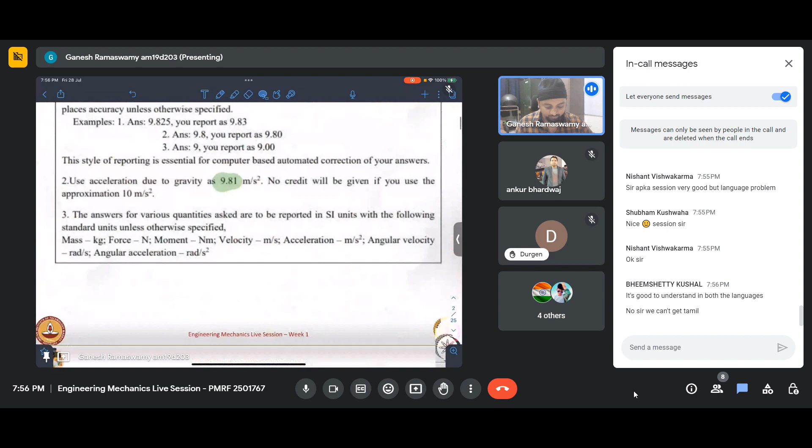Okay, so to recap, what we have seen today is how forces are calculated, how moments are calculated, what is the law of vector addition, what is a fixed vector, what is a free vector, what is a sliding vector, that we have seen in detail. Then we saw how to write forces in its component form.

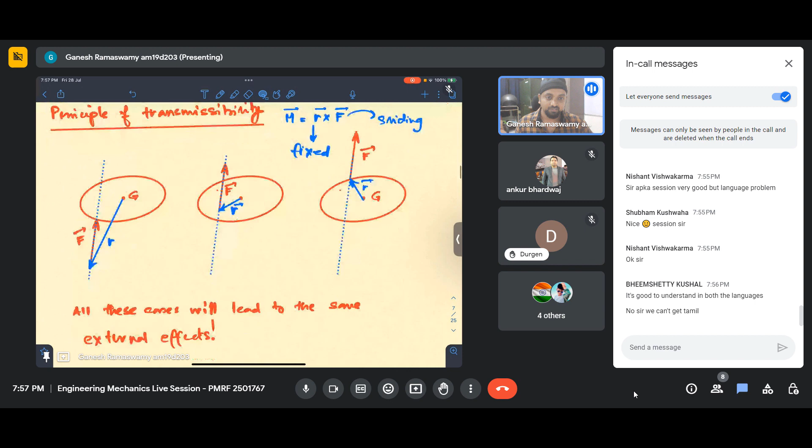Then we have covered this important principle of transmissibility, which is very essential to understand force systems.